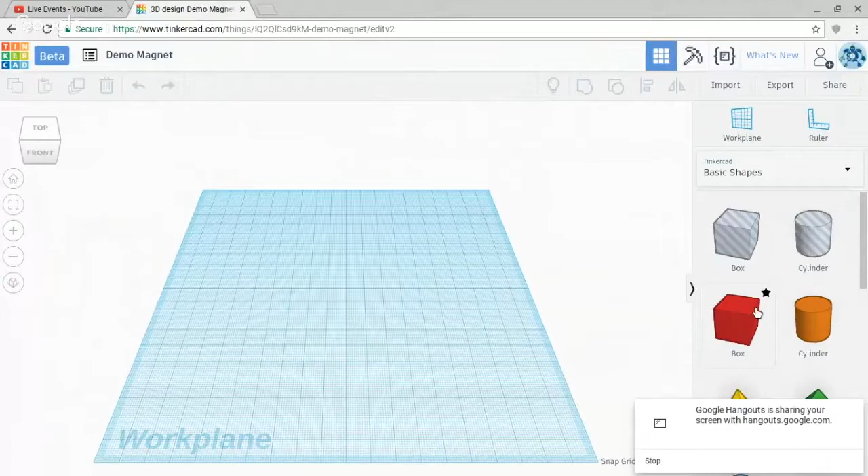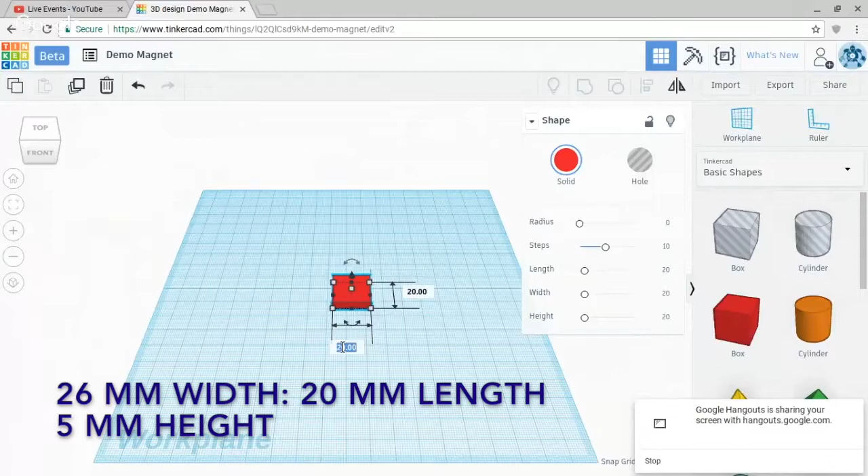So in Tinkercad, I'm going to build myself a box. The box needs to be, let's say, 6 millimeters. Nah, let's make it 5 millimeters high. Okay. And then we're going to need the box to be 20 tall. That's good. And we're going to make it 26 long. Now we're going to flip the box to a hole. That's going to be where our little magnet front comes into place.

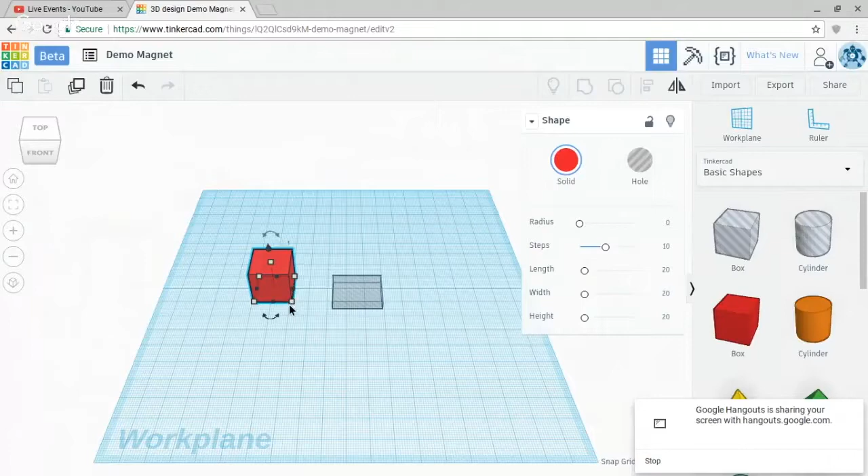The next thing we need to do is grab another box. Let me just check our measurements here. 20 by 26 by 5. Perfect. Okay. And what's our height? 5? Yeah. Excellent. 5 is good for a height too. The next thing we want to do is grab this guy, and we're going to make him magnet sized. Well, fridge magnet sized. So we're going to make this, we'll say 30. And we're going to make our length 100. And since the hole was 5, let's make this 6.

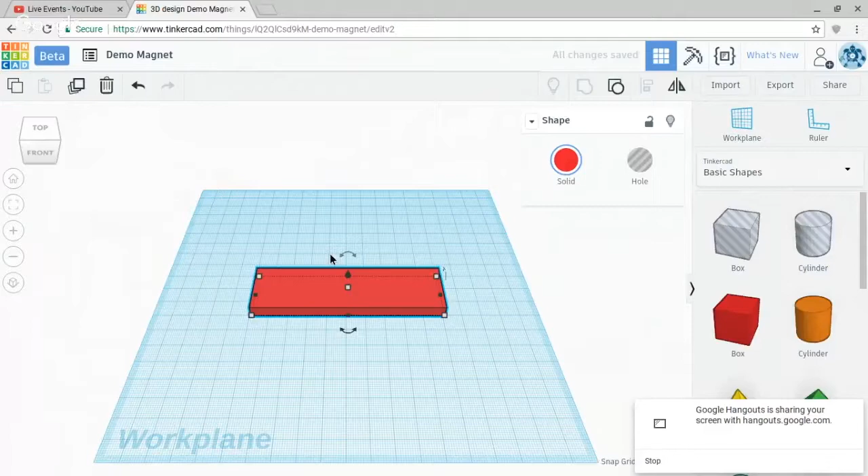Now, we're going to highlight everything. We're going to go to our alignment tool and center and center. Now I'm going to highlight everything again and group. Now, if we look at the bottom, you see a lovely hole just ready for that magnet I showed you at the beginning of the video. Now, a boring rectangle, probably not the best thing to put on a fridge, although if I printed it in white, you could color it. Well, that might be fun, but we're going to go a bit above that.

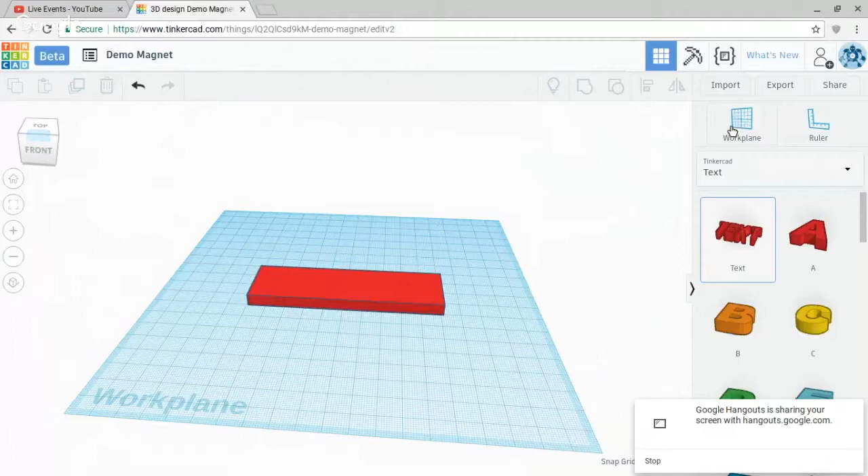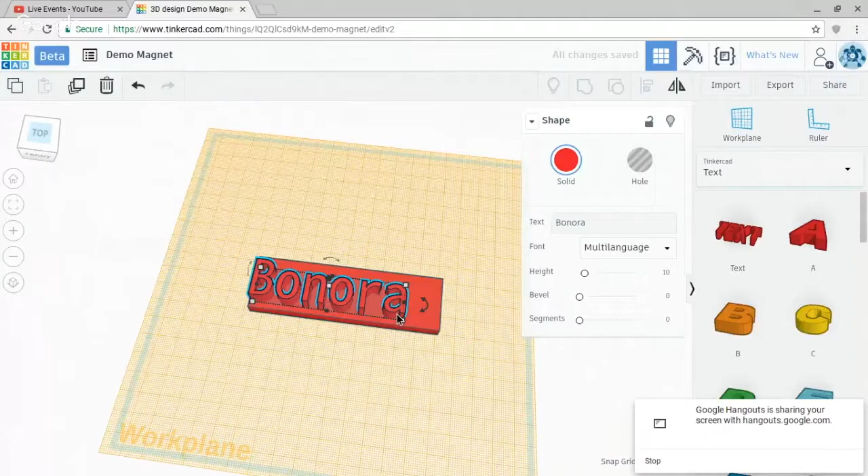So I'm pulling up my text, and I'm going to put my work plane right on top of that. And let's see, we don't want it to say text. I know. I want it to say Bonora. But let's see, saying Bonora by itself, I don't know. That's kind of boring. So let's adjust the word Bonora here. Right? So there's that. And we don't need the word Bonora to be 10 millimeters tall. So let's drop it to 4. That's much more manageable.

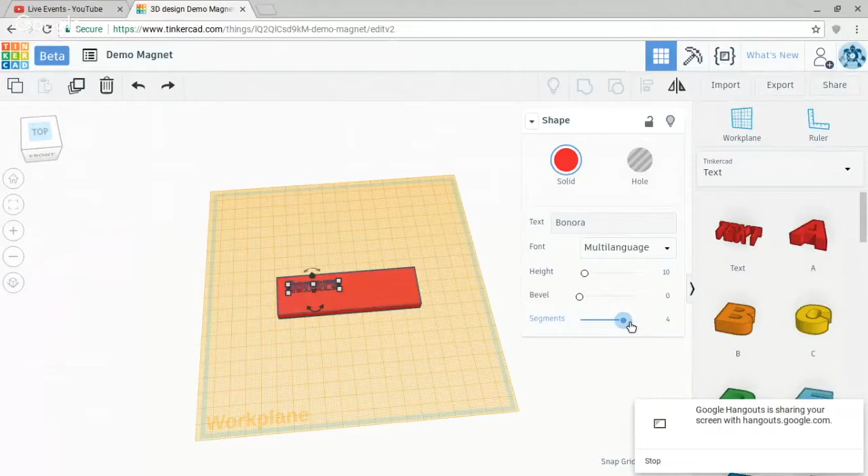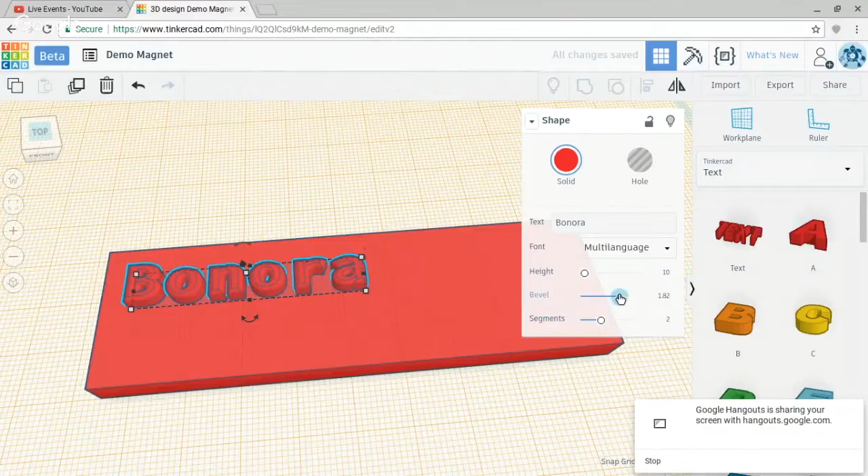Okay, so from here, I have the word Bonora, and I'm going to do a couple of things. If you play with this segment slider here, it kind of rounds out your words a little bit. So let's see. And this bevel. There we go. It looks like the internet's not playing nicely with me. Oh, because there's 2. Huh. All right, so let's delete that Bonora. I must hit Control D. All right, and let's bring my segments down a bit. I like that. That's a nice rounded letter. And let's see what happens. The bevel. I like that.

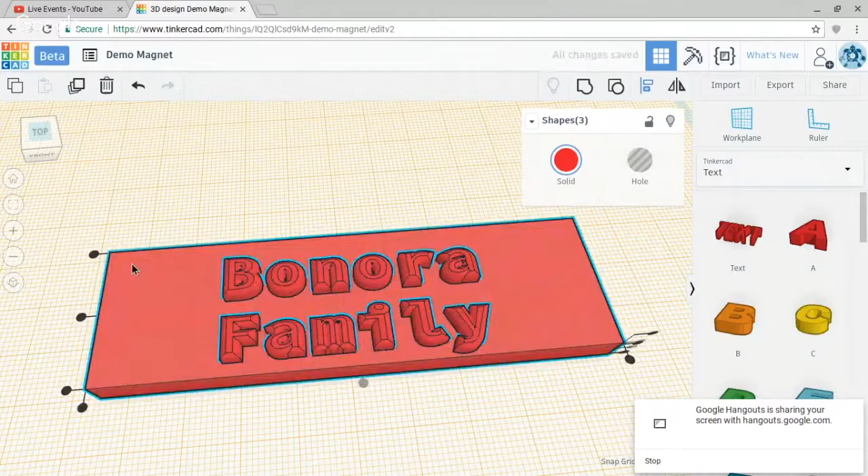That looks cool. Now I'm going to hit Control D because that's the style I really like. And instead of having it say Bonora, I'll do Bonora family. And they're both in that really cool kind of beveled style. And you know what? Let's center both. And let's see, this guy here, I like the spacing between them, but we gotta, there we go. And now that they're centered, I want to offset them a little bit.

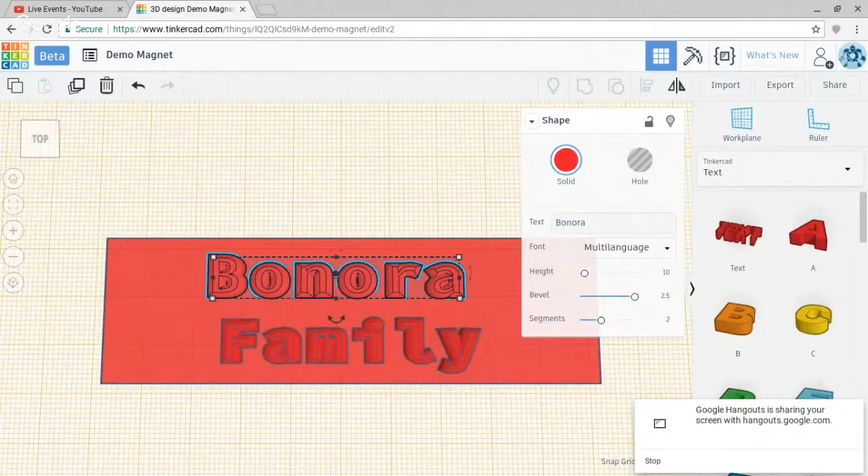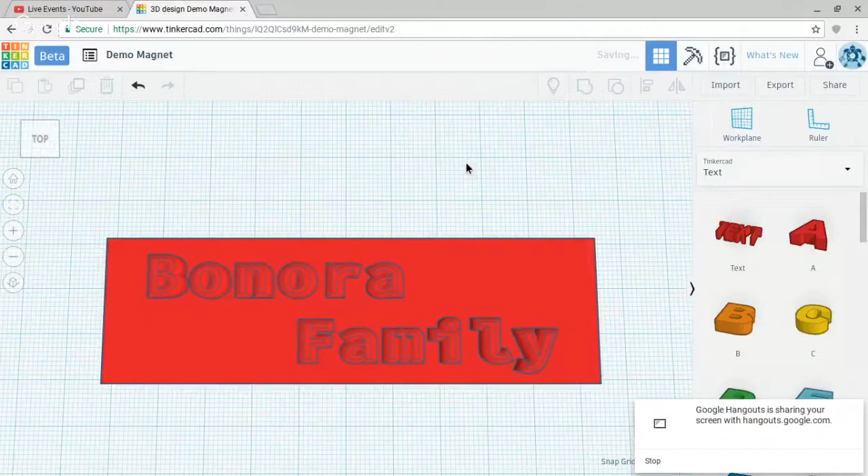So I'm going to click on the Bonora, and I'm going to offset by hitting the left arrow key 15 times. And I'm going to do the same thing with the family, 15 times. All right. And that's pretty much how it's going to look. I can highlight everything and group. All right, if I wanted to get real fancy, I could cut away some of this, but I think that magnet is going to look pretty cool.

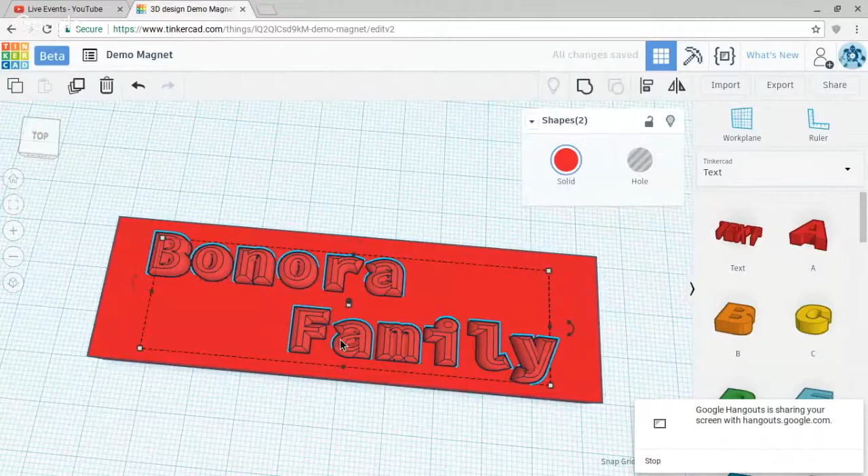You know what? Just for fun, I'm going to ungroup, going to tap Bonora and family, and I'm going to drop it by holding Control and hitting the down arrow once. Now you can kind of see it coming through the magnet, but it's the same height as that hole, so it'll be nice and good, and this actually looks like it's well attached. And that's how I'm going to make a 3D printed magnet.